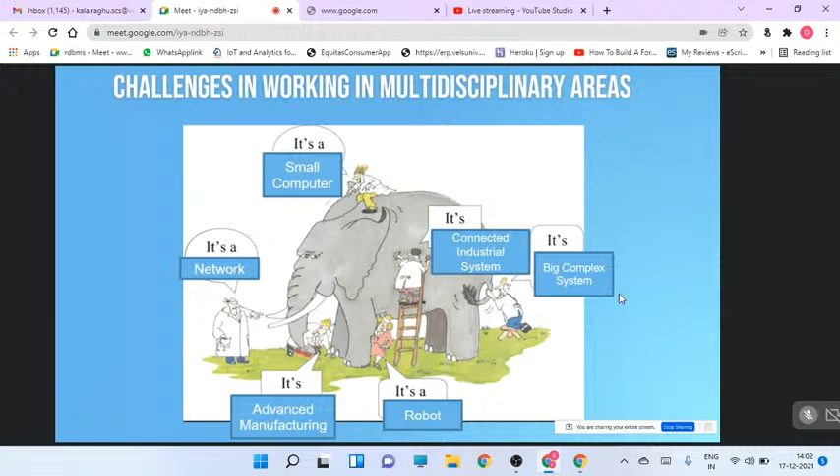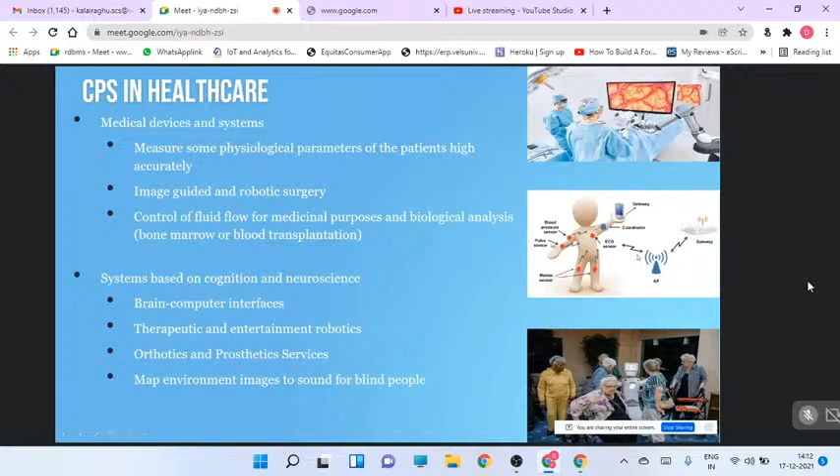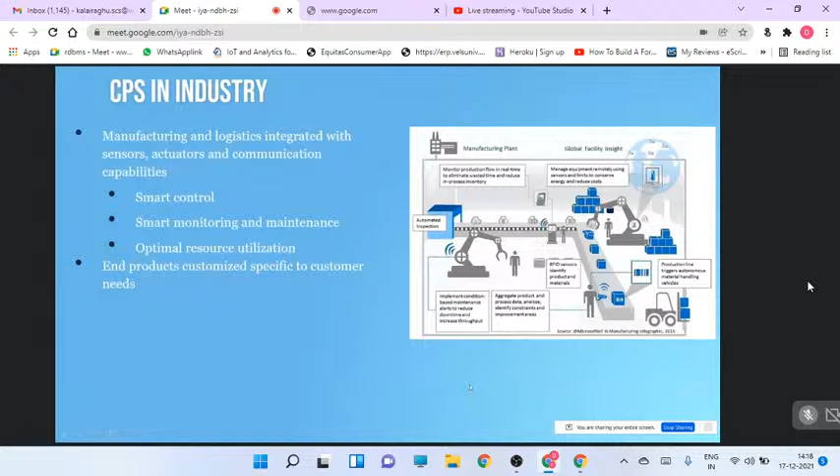So the next comes Industry 4.0. We are currently experiencing the fourth industrial revolution in terms of cyber physical systems. These systems are industrial automation systems that enable many innovative functionalities through networking and their access to the cyber world, thus changing our everyday lives significantly.

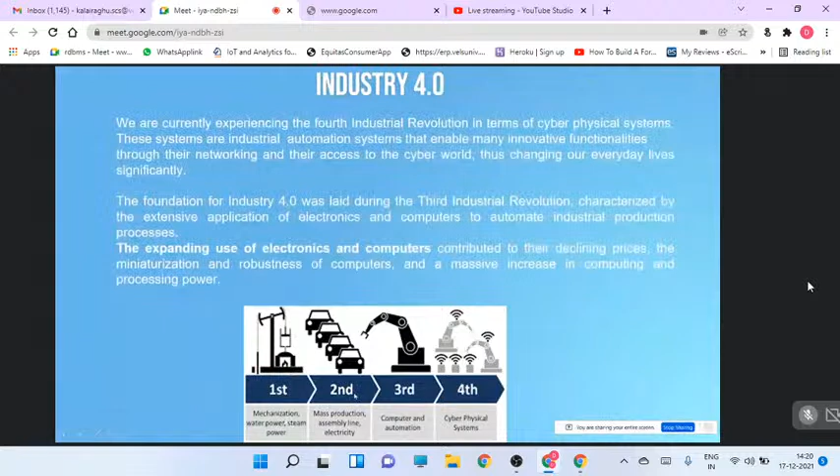You can see the first revolution, Industry 1.0, is mechanization, water power, steam power, everything comes into effect. In the second revolution, we have mass production, assembly line, electricity, everything. In the third revolution, we had computers and automation. In the fourth revolution comes the cyber physical systems.

The foundation of Industry 4.0 was laid during the third industrial revolution that characterized the extensive application of electronics and computers to automate industrial production processes. The expanding use of these electronics and computers contributed to declining prices, thus miniaturizing and robustness of computers.

When we see the computers in the third revolution, in some cases you would have seen them very bigger in size, but nowadays miniaturization has come into effect. Even mobile phones, when introduced in the beginning, were very larger in size, and then they have come in very smaller sizes. But the properties or the functionalities are more when compared to the previous ones.

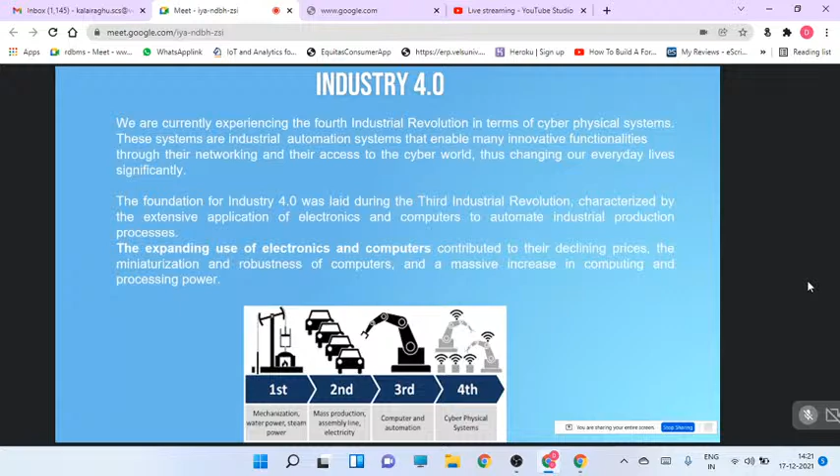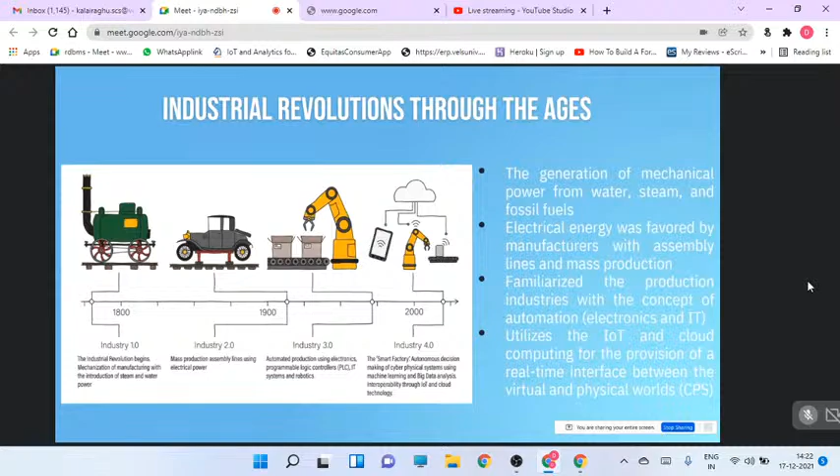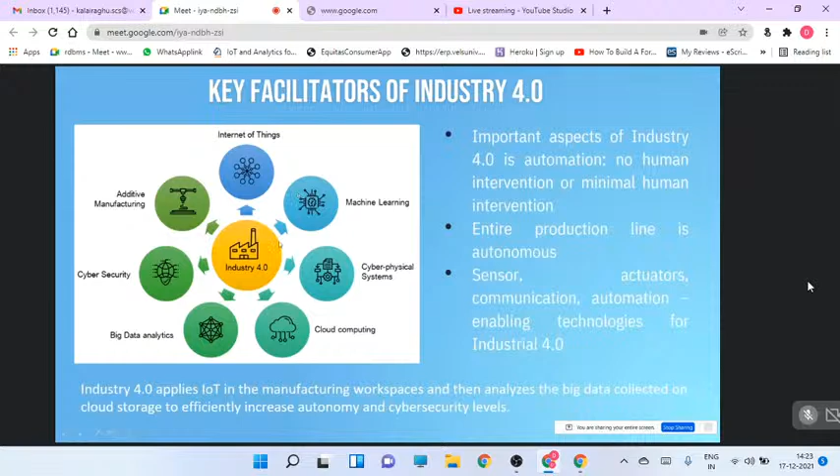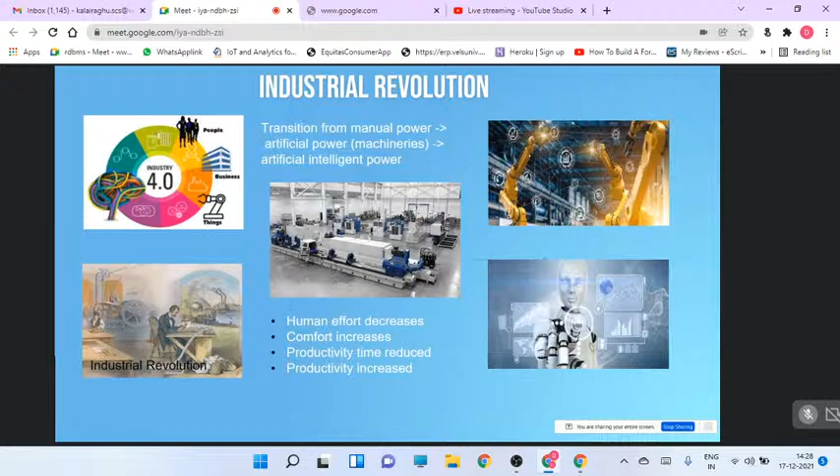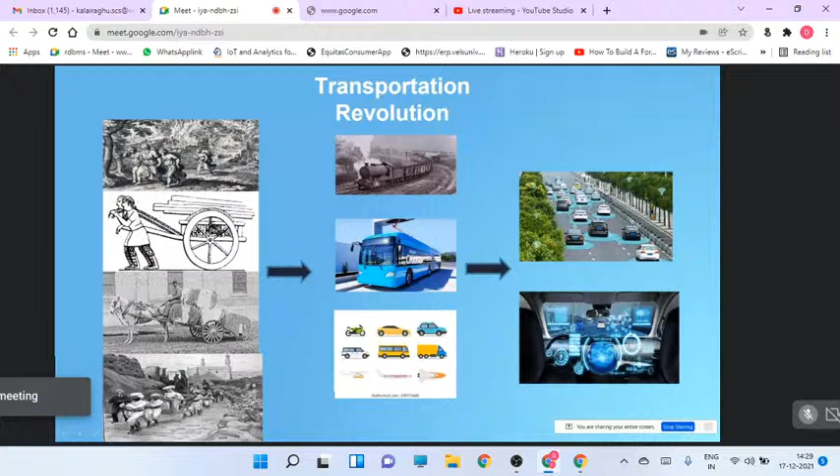So how this revolution transferred, like in Industry 4.0, we are having different revolutions. Different revolutions are started. Like in the previous days, how transportation was carried out, and then in the middle ages we have the second industry, Industry 2.0, we have like this, and now we are having the smart cars. Each and every car is monitored. You can see that circles around each and every car, so it is having the region of interest. Within that we are having their details, and we are having some self-driving cars. So automatic driverless cars are also coming into effect.

This is a manufacturing video, automatic manufacturing system.

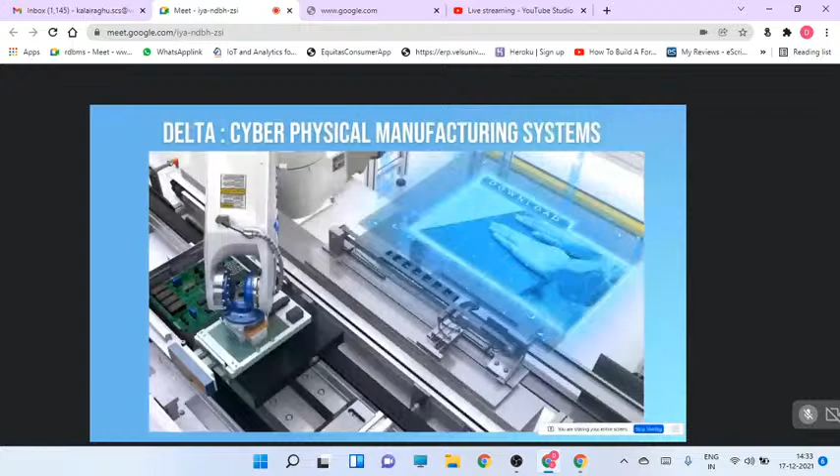So in this video, you would have seen how a product from the scratch is designed until it reaches logistics, how it is done, even the quality control, everything is done automatically without any human intervention, packing, and then it reaches the vehicle for transport. So like this, CPS is involved in the case of manufacturing. This is for some company by name Delta. For that company, I have shown the video.